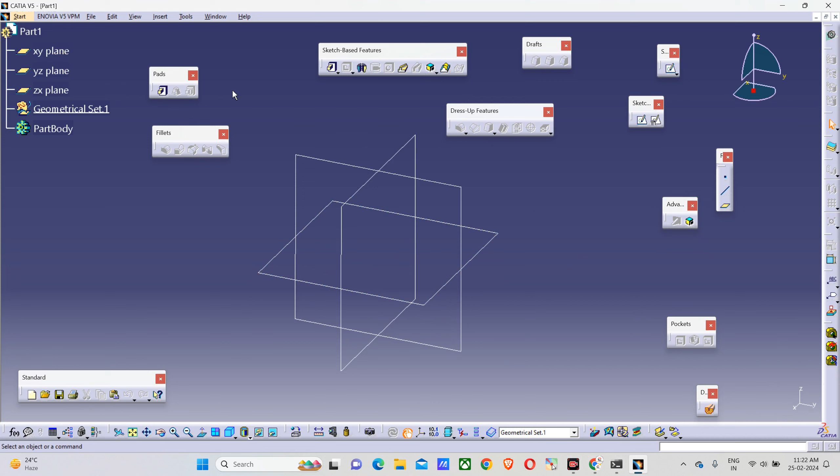What will be the first step? Hide all planes, right click H. The second step, quickly be aligned with me, we will proceed quickly. The second step... no reply.

Point 0 0 0. The screen is not visible, sir. It is not visible, okay. The screen is not visible. Hello? I shared the screen. Hello, sir. Okay, stop presentation. Earlier it was visible, now it's not visible. Just a minute. I think there will be some network issue. So the audio is clear. Yes, sir.

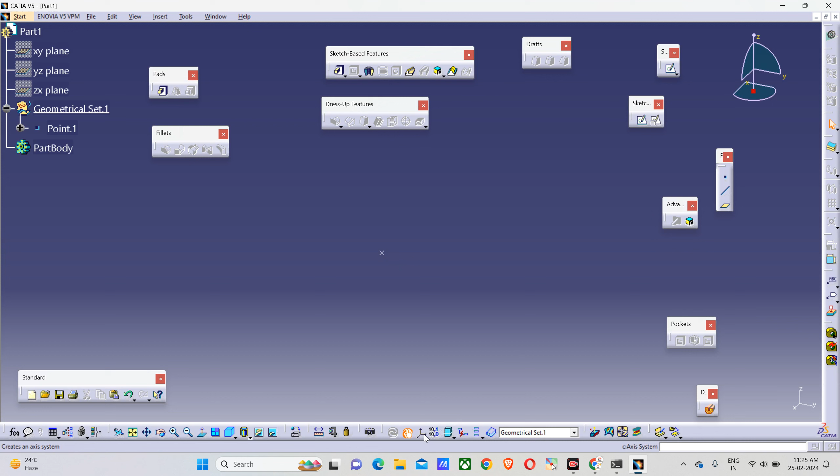So the first step is point, second is the axis system. We will give the input origin at this point. We will every time use a right-handed axis system. Press OK.

Any issue? Okay, position sketch. We will use the position sketch here. We have to select the axis. Yep, we will use this axis. Let's reverse the V. Our rule for the position sketch will be on the right side.

H, H, top side, V. Okay, reverse the V. Swap. Okay, low light.

I will draw a sketch. We'll give constraint, this is the constraint command. Click on this, give some dimension. Okay, what is the condition now? The color shows over constraint. Yes, under constraint, over, let this one be.

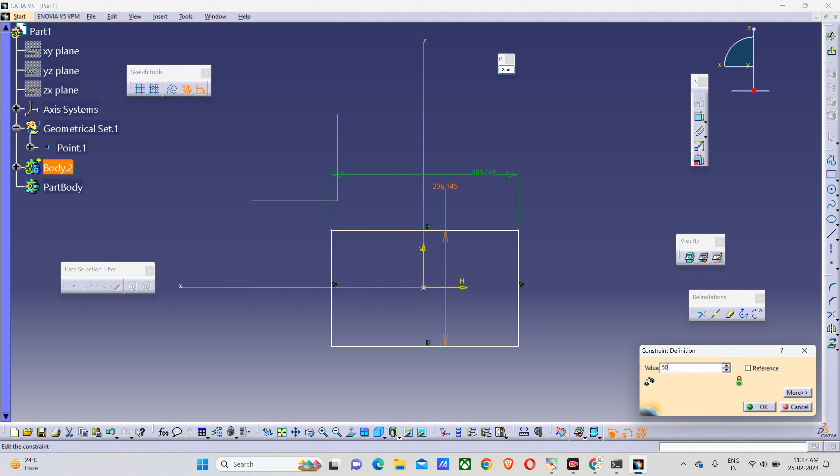100. See, once you get friendly with Catia, we will proceed very quickly. We will increase our speed. Okay.

So are you facing any issue with the mouse handling, or is it clear how to use the mouse? See, while moving, you don't have to use any keyboard button, okay? Just use the mouse.

Okay, insert body. So is everyone okay with the pad command? Is there any issue with the pad command? No, sir.

So what is the difference between the simple fillet and variable fillet? This is an interview question. Simple fillet dimension will be the same throughout, and variable fillet will vary according to the points where we keep different radius values.

Okay, so your name please? Asif. Okay, thank you.

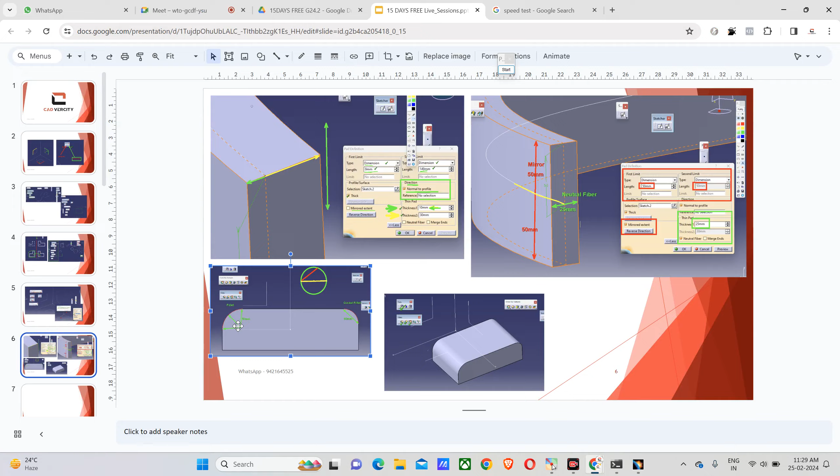Second question: what is the difference between simple fillet and chordal fillet? Simple fillet takes radius from both sides, while chordal fillet takes the distance of the chord. This is the chord and the simple fillet.

Okay, what is the option in pad? Pad width, dimension, and pad up to limit. Yes, up to plane. What are the multiple options in pad?

Thick, okay. Again, this option type, types, neutral dimension, fiber, okay these are the tickable options. Any option from this dropdown? Neutral fiber. Sorry, I'm asking about the type.

Up to next, up to last, dimension, yes, up to plane. Okay.

Up to surface - see, we haven't covered up to surface because we haven't started surfacing. We will cover it later. It is very simple, just like up to plane, but instead of a plane we give any wavy surface.

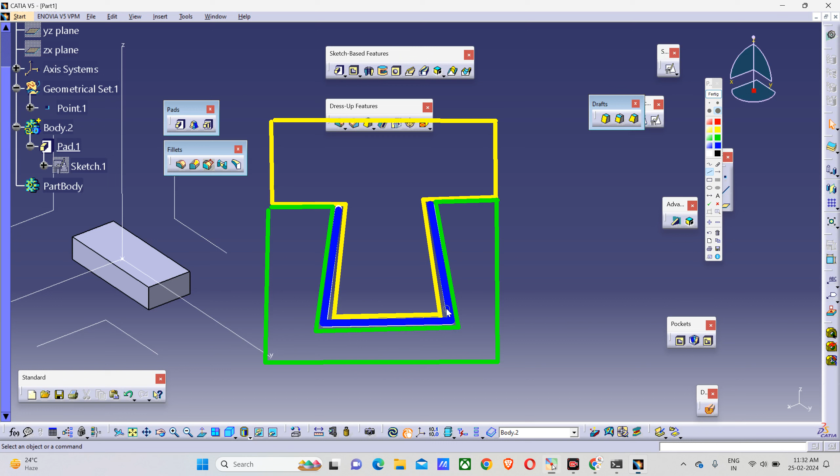Toolable means suppose you have designed this blue part in CATIA. So is it toolable or not? This is your tooling direction. What is tooling direction? It's the direction in which your core and cavity will disengage and engage, like this.

Okay, see this is core cavity. I will explain from the start. Suppose this is a blue plastic part. I design it in CATIA like this. Okay. So this is my part, something like this.

Having thickness of something 5 mm. So I will need a tool to manufacture this part. So how will be the tool? Like yellow and green, and my tooling direction will be like this.

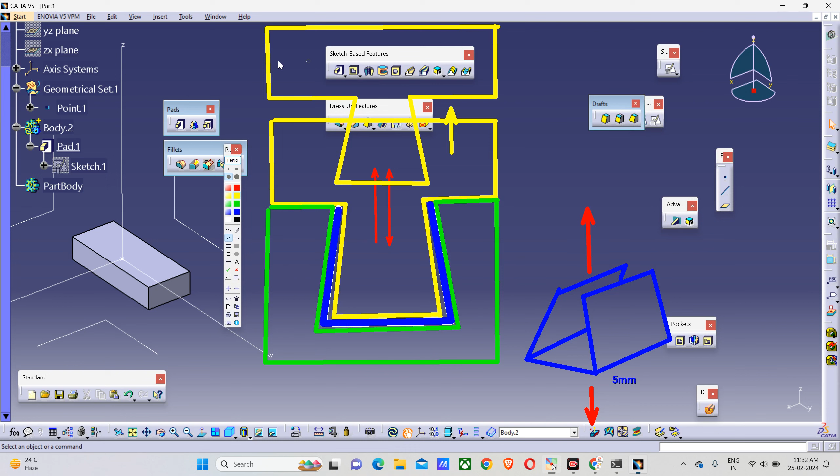Yes, what is the tooling angle? Okay, so the second drawing I will draw over here. First I will take a screenshot of this one. Finish.

See, today is Sunday. We will cover some technical questions, interview questions, and technicalities related to design. So this point you have to keep in mind while designing any part.

Okay, now the second condition. The same figure I will use. Okay, so yellow color, is it visible? Is it okay with the yellow? Yes sir. Okay, we will use some... so I have to use the same color because I want to show you what we can do. We will use this background.

Now is it okay? No, it's okay. See, for now this is the second profile. Just give me the answer whether it is toolable or not. Yes sir, now it is vertical. Perfect vertical. Yes sir, it is toolable.

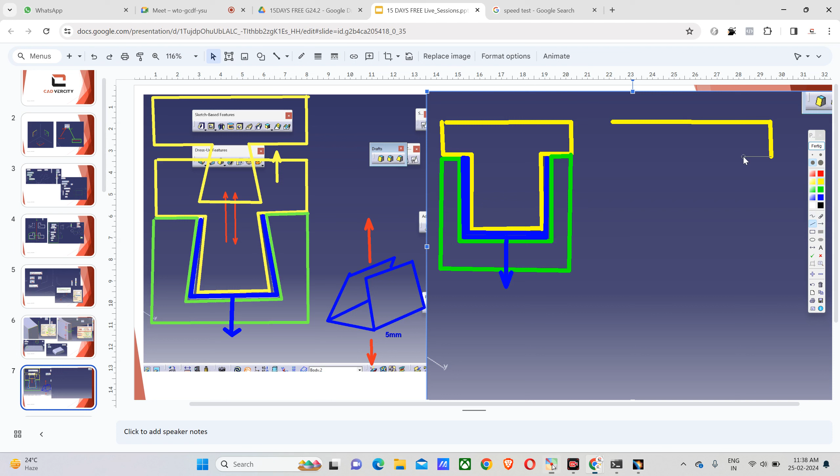So is it okay, meaning can we manufacture the blue part like this? Yes sir. Okay, now this is the third design, I will draw the last one. This is also possible.

Now give me the only one answer: the first, second, or third, which is the best? Third one. Second one. Okay, no, not second, not third. Just one answer: third, second, or first? Third.

Why? Because it will be easy to inject and move in the direction upward and downward, and less chance of destroying the material. Awesome, so this is the perfect answer. This your second statement is the perfect answer.

So there will be zero friction between the yellow, blue, and green. Yes sir, in this there will be friction, and this is impossible to engage and disengage in the first one. So can you imagine how this corner will come out from the green corner like this vertically? This will hit over here and also it will damage our blue part.

So what is this, the red line? Oh sorry, the red arrow. What is this direction? We call this MTD. Write it down in your book: MTD. What is MTD? Who can give the answer? Main tooling direction. And your question was, sir, what is toolability?

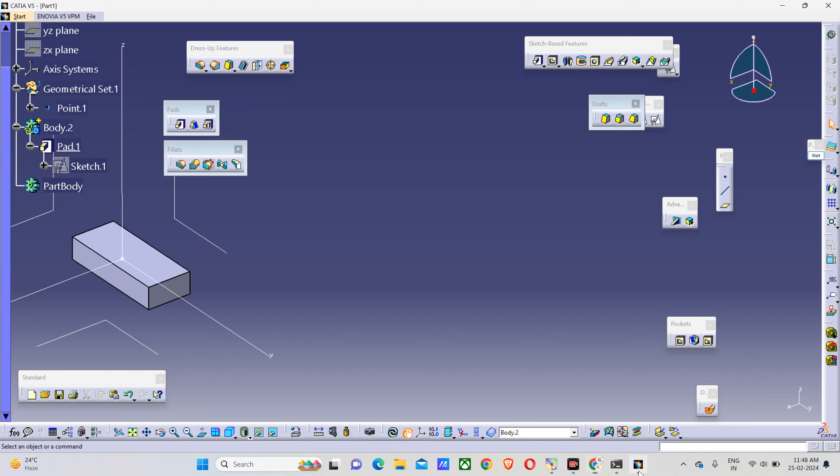See, this is our rectangle, okay. I will increase the height, make it 80. Right click on body. Okay, now we will provide the draft. The first one, we don't need the second and third draft. No use of this, just only the first draft.

See, in draft, we have to give two inputs. First input is on which faces you want to apply the draft. And the second input is what will be the neutral. What is neutral?

See, suppose I am giving draft to this vertical face. So what will be neutral? The neutral will be the bottom surface, this one, from which the draft will start. Okay, like this, suppose this is the box.

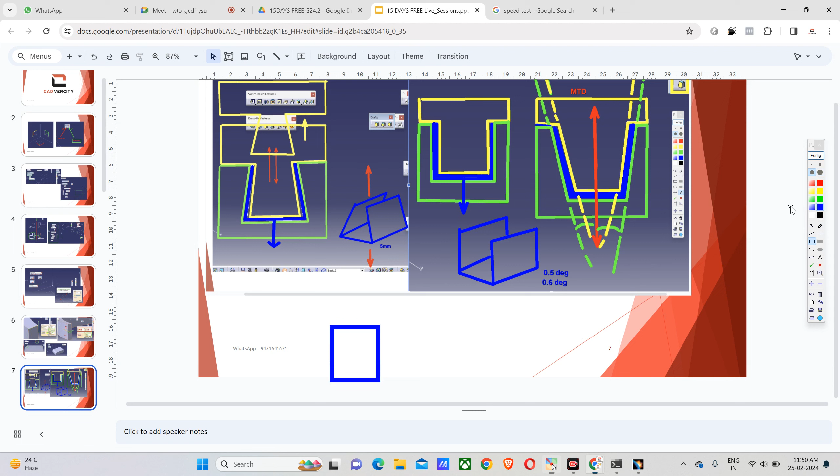I want to give a draft. Okay, so what will the draft look like? Like this, one, two, three. So what will the neutral be? See, I have to keep this length as it is. I want this length as it is, this one. So you can see the length is same. So what will be the neutral in this command? The bottom face. Bottom, okay, and what is this?

This will be my MTD. MTD.

Okay, the second case is the same. Suppose I want to keep the upper face as it is, like this. I will use blue, black, yellow, black. Okay, I want to keep this as it is. Okay, and it will be something like this.

Then which will be the neutral for this one? The neutral face, upper, upper side. And the tooling direction, downward. Remove green, this. See, in this, I will put upward. Are you getting my point? Yes, sir.

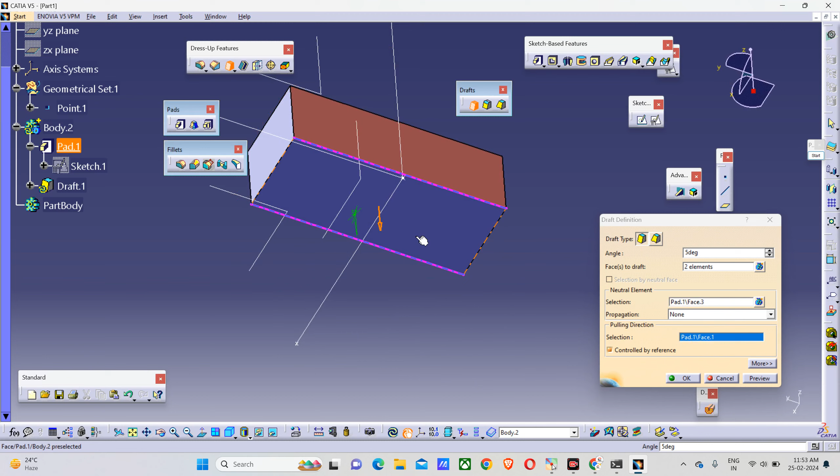By default, once you apply this command, the pulling direction will be normal to your neutral face. But you can change this direction. So here you can see the orange arrow is completely normal to this neutral face, and our bottom face is also perpendicular to our Z-axis. So I can give the pulling direction, or keep it as it is, or change it to Z.

See, previously it was downward, now it is upward. Is it okay, or is it the wrong direction? What should the direction be, upward or downward? Upward, you say. But what did we discuss earlier - downward or upward? Downward, yeah.

So now it is upward. I will show you the preview. Can you see the angle? I will increase the angle, let's say 15. Can you see the angle? Do we need this type of faces? No. So in our sketch, what was the condition?

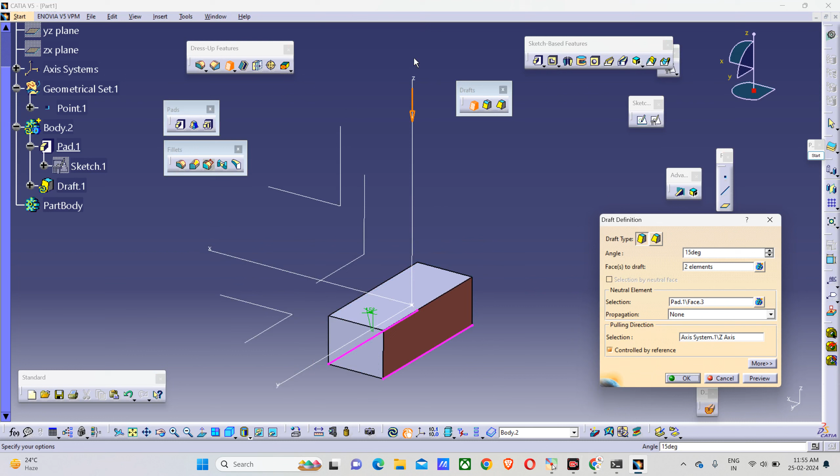So what should the pulling direction be, upward or downward? Downward. I will click on this arrow, it will get reversed. Now preview - is it okay? Can you see there is no change in the bottom length? But this upper surface length will change, it gets increased. I will just press OK.

So double click on the draft. What will be the minimum value of the draft angle? 0.5 degrees. On the safe side, we will take 0.6.

Now is it vertical or having the draft? I will click on this Y because I have drawn the sketch on the ZY plane. Once I click on the compass, you can see the compass, I will press on Y. Now is it vertical or drafted? The vertical faces - is it drafted? See, our sketch is perfectly vertical, but once you zoom, you can see there is a small change.

It's a very small step change in angle. Can you see the angle? Is it a small change? Sir, this change is very negligible.

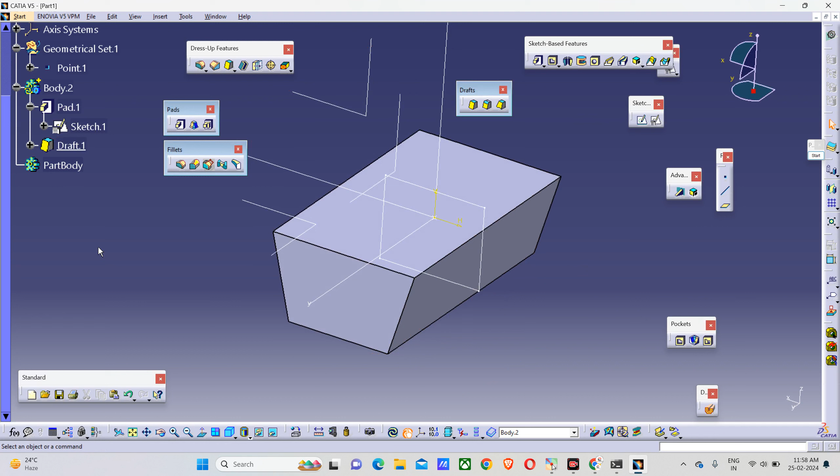So what do you think, shall I give draft to this face also? Just a minute, what I will do is increase the angle for now, let's make it 15. We want such type of design, with thickness of 5mm. Can you see the 5mm? What I will do is use pad draft - see, once you click on the command, it gets highlighted.

On this two faces I have given the draft. What I will use after the draft is the shell command. We use this command, okay? Shell - what will be the inside thickness? 5mm. Everyone knows this command shell, we covered it yesterday. So for face to remove, I will remove this face and this face. Press OK.

But there is something missing related to toolability. Is this part toolable? Yes or no?

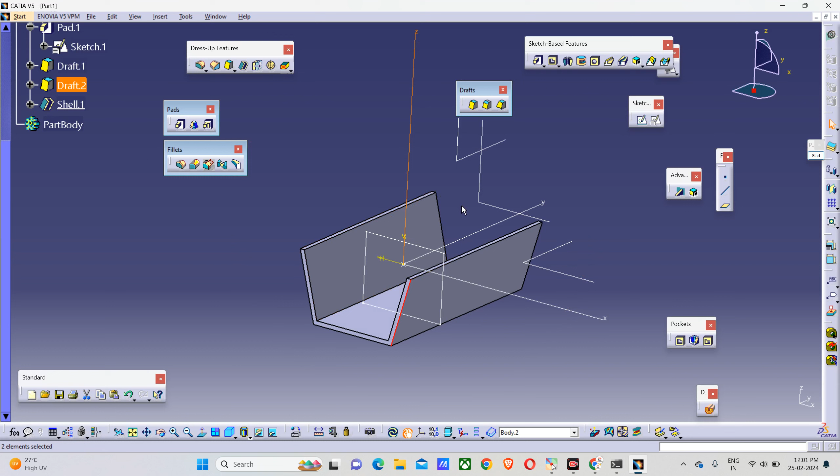Previous two steps means okay, see.

What did we do? What was the first step? I had drawn one rectangle like this. On which plane? The YZ plane. Then see how to check the history.

Right click, shortcut F. What do you have to do on pad? Suppose I'm sharing this file with you, what do you have to do? You have to right click on this command and press the F button. Now this is your first step.

I have drawn one sketch, then I have the pad. What is the second step? Right click on Draft, second command, right click F. I have provided the draft on these two sides.

How? Double click on the second command and check. You can see this box, you will see face 1, face 2. Yes, close.

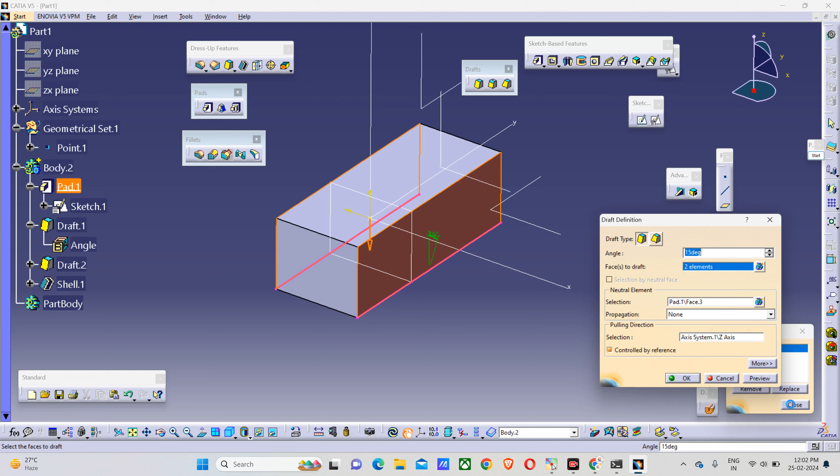Then what is the input? The blue one, the blue surface, is the neutral element. Click on this box, you can select and check this is the neutral element. I will close this one. And what is the pulling direction? Z axis, can you see? Z1, this one.

Preview. So the drafts are okay. I'll press OK.

What was the second step? Third step, this second one is done. Third step, right click, shortcut F.

See, these are the two faces. Double click. What is the input? Face 1, face 2, rear and front face. Close. For the neutral, you can see the bottom face is neutral.

Close. What is the pulling direction? Z axis, you can see the Z axis. The direction is downward. Preview.

Okay, don't press OK, just you are checking. So press cancel. Okay.

Then what was the fourth step? Right click F, Shell. In shell, what input have I given? Double click on shell. I have given the front face, top face, and the rear face.

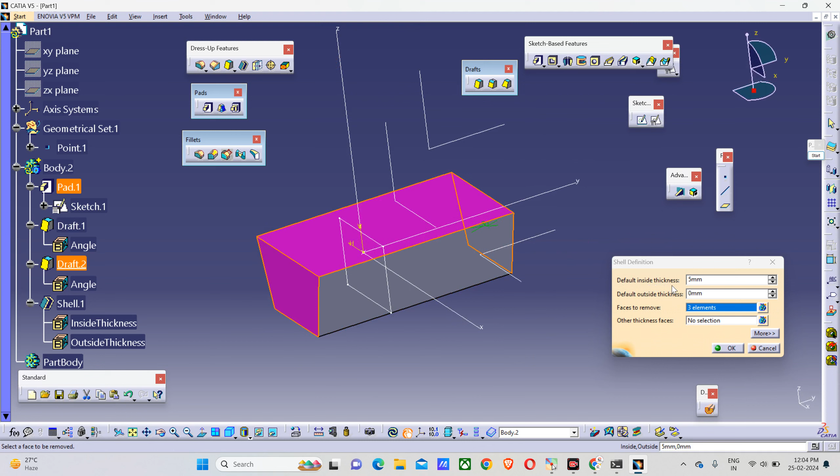I have provided the inside thickness. You can give the outside also. Suppose I want inside 5 mm and outside 0 mm. Press OK.

See, okay. Any doubt? No sir. See, suppose I want these faces smooth.

Fillet. When can I apply the fillet, on which command, and what position will the fillet take in our tree? Sir, here now we can apply, or before shell. Awesome, before shell.

Once I provided the draft, I will define over here, right click F. I want the fillet command between draft and shell. What I will do is define the draft, then click on the fillet.

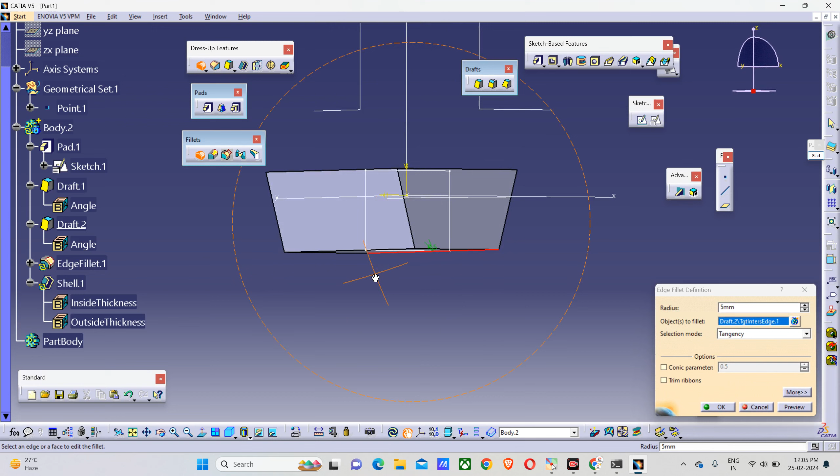1, 2. Giving fillet of 5 mm. Let's see, okay. Press OK. Now what will the next step be?

Define shell, right click F. Then again right click L. Awesome. Is this the sharp edge or a smooth edge?

Smooth. In which mode can I see the edges? Yesterday we discussed the third one without smooth edge. Here, once I click on this, you will see only sharp edges.

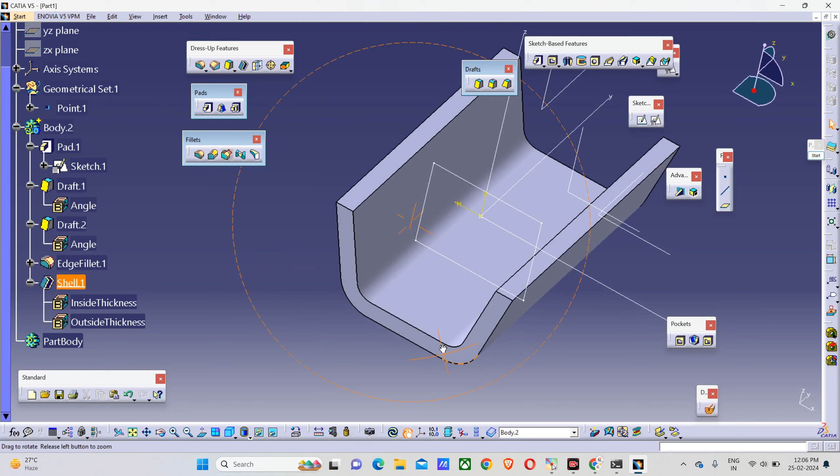So once I see this, can we do one thing? I can provide fillet to this face also, these edges. How can I do it?

Now also it is possible. Before shell, can I do it? Yes sir, okay, so what will the process be?

Where should I define first? Now you can again go to edge fillet one and then right click F. Okay.

Now again choose fillet. Sir, fillet. And take both edges, 1, 2. Preview, okay, it's okay.

Then shall I define shell? Yes sir. Shell, right click F. What is the shortcut for update? Right click L. Awesome.

So this way you have to play in the tree. What do we call this? Tree.

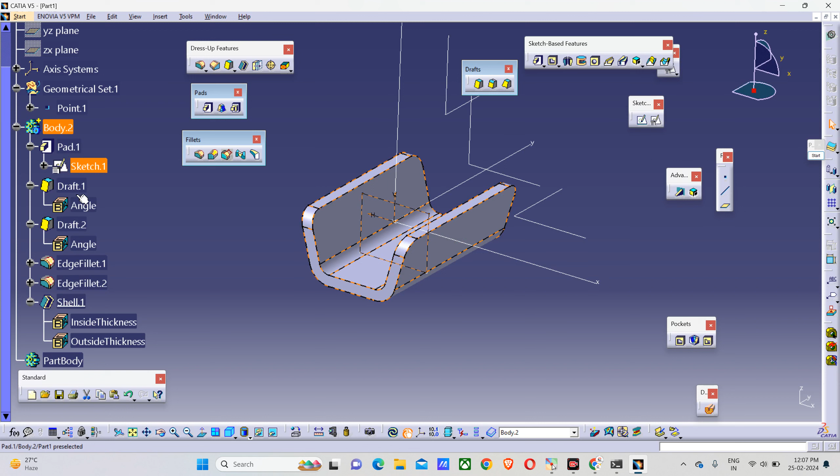Okay sir, so now you can give fillet over here. One, see you can see the flow. Once I click on this, it will flow smoothly.

You can give the fillet of 0.5 just to avoid the sharp corner. Enter.

Awesome. So this side also? No, that side we will not give the fillet. Why? Again, it's an interview question. Making it sharp, no, no.

See, once I keep it like this, now what will be our tools? I will draw a tool sketch. How will our tool be?

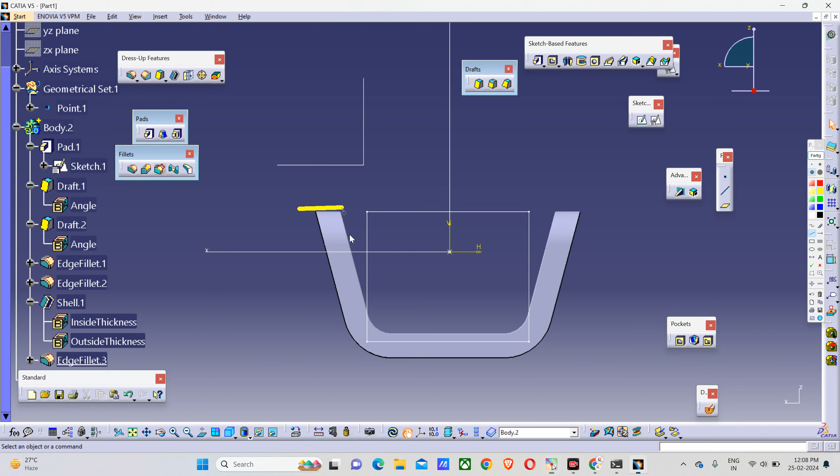This will be your interview question. Okay.

So here you can add fillet. Yes, where you can add the fillet. Over here you can add the fillet. Here we added the fillet.

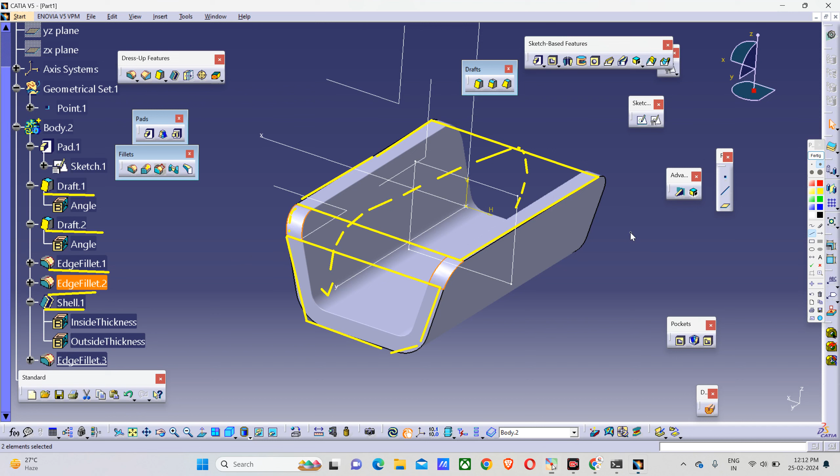Okay, any doubt? Yes, no? No sir, thank you. Okay, so we are completed with this one. Don't use this second and third.

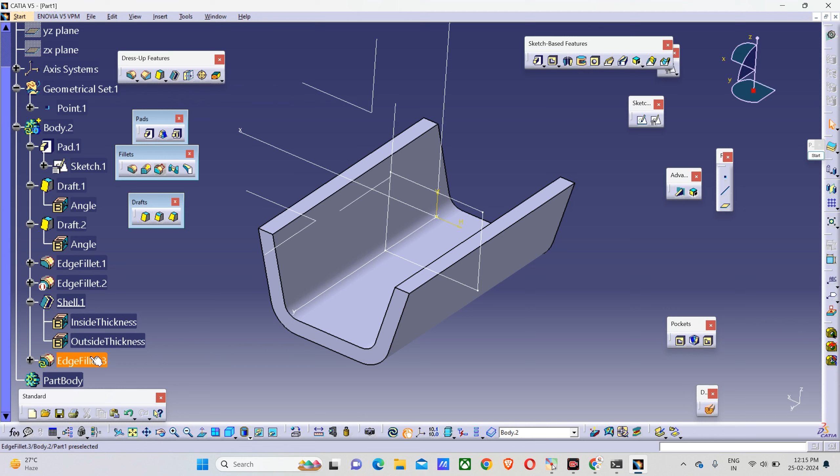Okay, just a minute, shall I update this fillet? Right click F. See, previously why I'm doing right click F then right click L - because I can see by right click F the previous fillet was something like this.

Okay, but once I click on right click L, can you see this fillet over here only, this one? So can I give fillet now over here, four times? Where should I place my new fillet of this corner in the tree? 1, 2, 3.

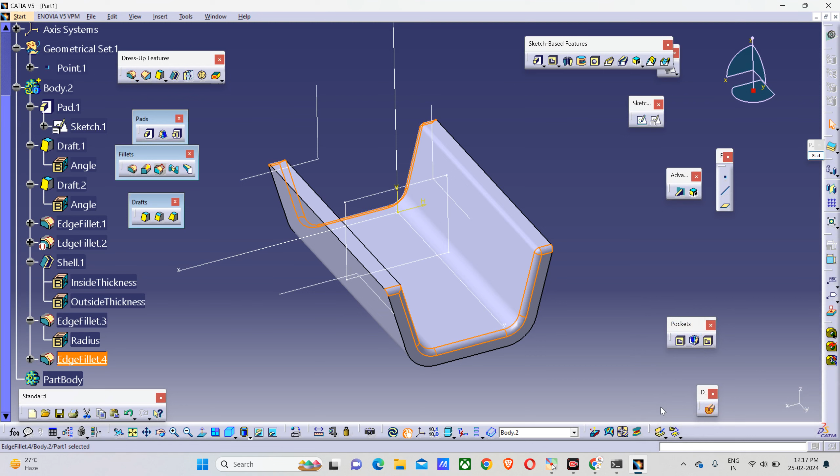So is this okay or not okay? Is this okay or not okay? Yes, not okay sir. So instead of giving fillet over here, I know that this fillet can flow.

I will define this fillet, okay? Right click F. I know that if I'm giving the fillet over here, it can flow something like this. Just a minute, it will flow something like this. It will come like this. It will go downward, it can flow something like this.

But before this, I will need a smooth transition over here on the corner. So what I will do, I will define this fillet, and after shell, I will apply this command between shell and this fillet.

Yes sir, how can I do this? I will right click on this one, EdgeFillet 4, I will reorder. See, we will learn this reorder later. Okay, I will delete for now. Maybe we can delete it later.

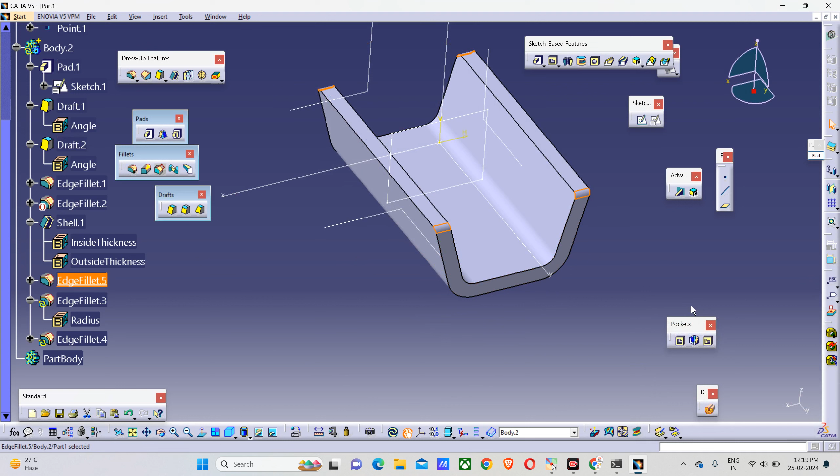Yes, after shell, now you can see we are getting a smooth transition like this. On this fillet I define, right click F.

Previously the fillet was something over here only, but it is in red, meaning it is in update mode. Once I update it, right click L. Can you see the flow?

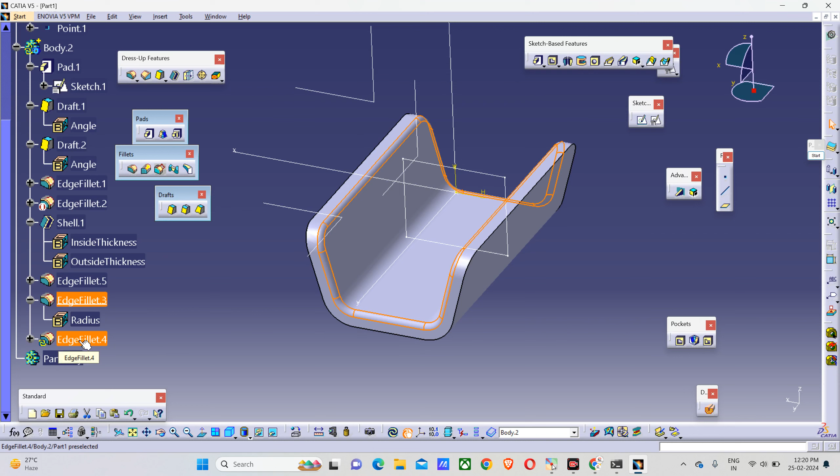If I define, right click F, you can see here we were having a sharp edge.

So the flow of the tree should be good if you want to minimize your design. Instead of giving 3-4 fillets, just give one fillet. It will flow something like this.

So now I can deactivate or delete this command. Right click, delete. Okay.

So just tell me, see, we have deactivated this one. So was the first option good or the second option good? After shell, then fillet - first option was good. So what I will do, I will activate this one.

Right click, activate. I will define, right click F. I will update, okay, this is updated. Then we applied the shell command.

Right click F on shell. Right click L for update. Then we provided - so we don't want this fillet now. Do we need this fillet now? We are already getting this fillet in shell. So right click F, we don't need this.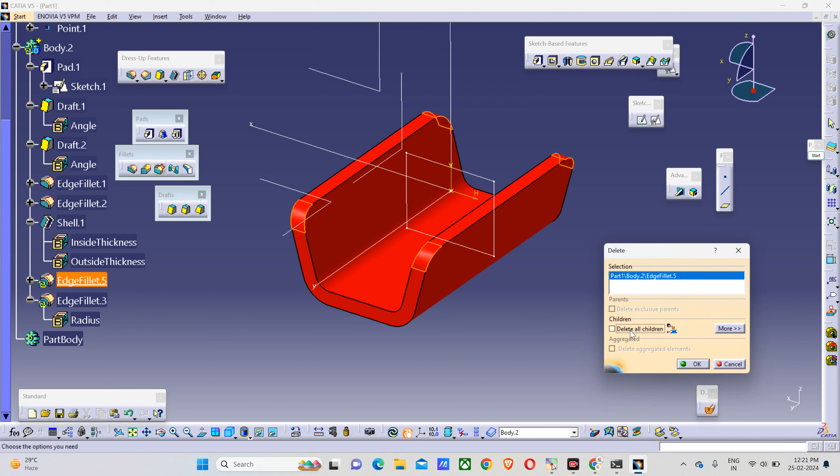You can deactivate or you can directly delete. Delete - see what is the warning? Once you delete this command, this fillet will also get deleted. But I will untick this, don't delete, meaning delete all children. I will deactivate this, will press OK.

Any doubt? See, why am I explaining and spending so much time on this? Once we start some complicated design, you have to keep your history very simple, okay? This is a very simple and systematic design, what we need.

Any doubts? No doubt. Okay.

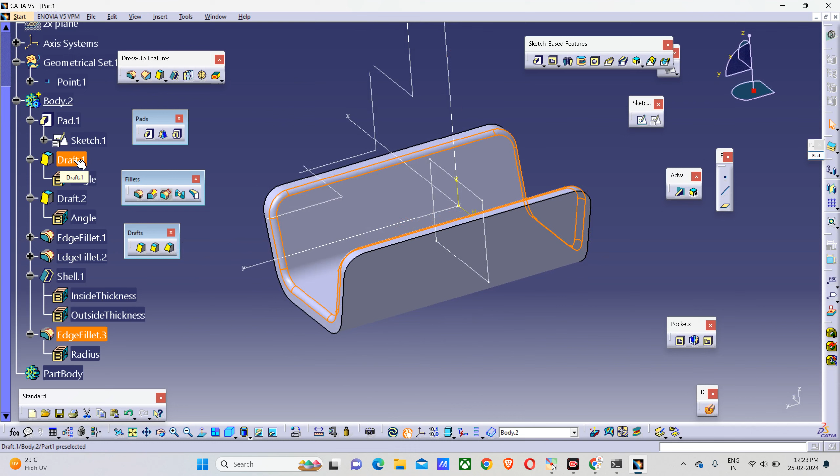See one point, we will check our draft direction. I will define this draft. This draft is okay, okay. And this draft - what do you think, is this draft okay or not? What do you think?

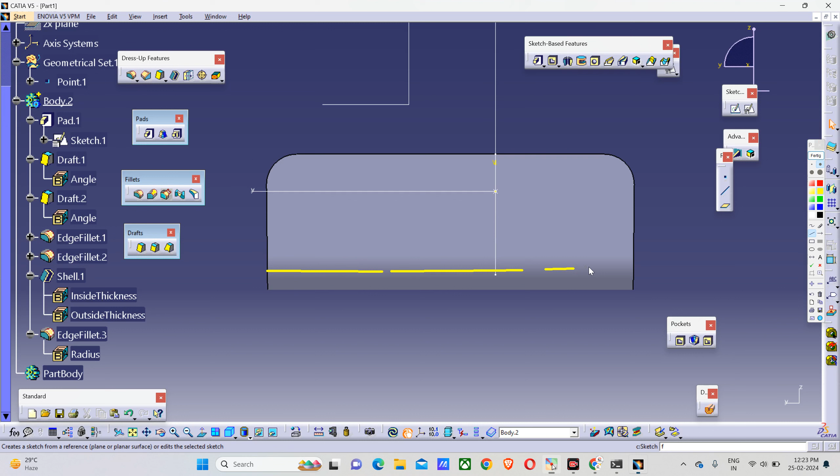So what will be the core cavity on this side? If I draw with the sketch, it will be something like this. See here we have thickness, yes - thickness of something 5 plus 10. So our core will be something like this - core cavity.

So here we will need the draft angle concept. We will cover that concept later once you start 3D modeling. Do you know what is draft angle? Does anyone know what is draft angle?

The second name for that concept is shut-off angle. No, sir? Okay, no issue. We will cover that, it's an interview question. We will cover it later.

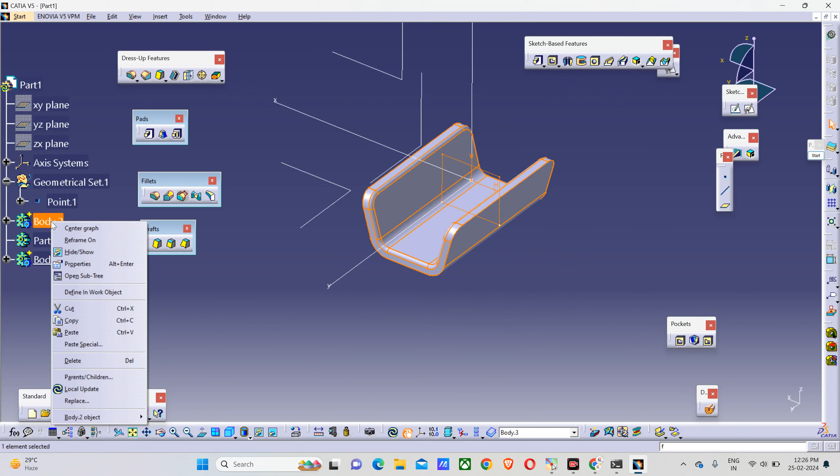See, what I will do, I will copy, right click copy. What will the shortcut for copy? Control C, or right click copy. I will right click on this part file, will paste. I will get a new body, body 3. I will hide body 2. Okay, this is our first body. I will hide this one.

And who was asking the question? Your name please? Abhi sir. Okay, so you don't want fillet over here, you just want a sharp edge.

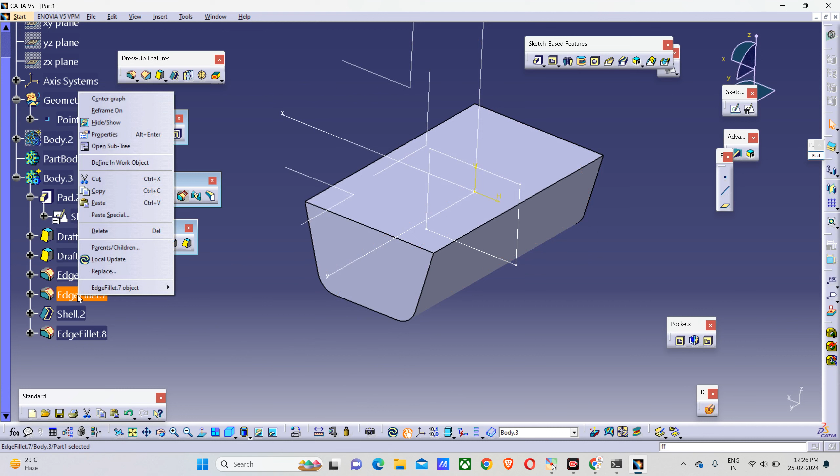So I will check the history. First, right click pad, define. Right click on draft 3. Okay, this is also okay. Right click, draft is okay. Right click. So this fillet is also okay. Right click, okay, right click.

See, now you are having a sharp edge. If you don't want any fillet over here, you will need to cancel this fillet. So why are we getting this fillet over here? What is the reason, on this two area?

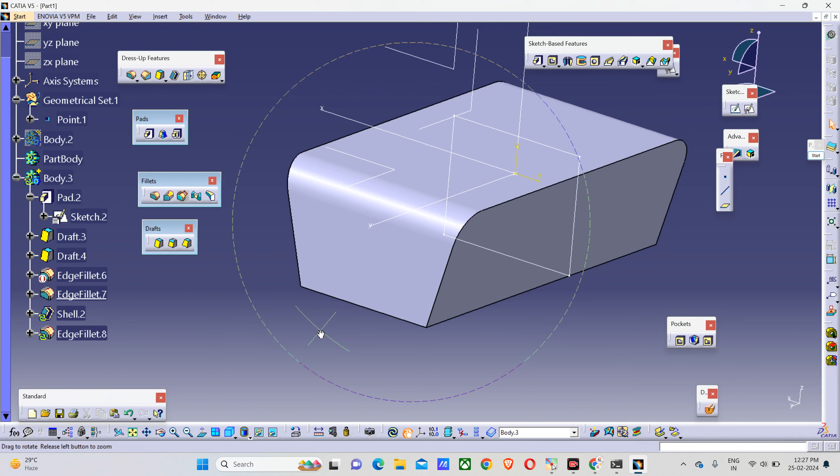Now right click, will check, right click. Okay, define the shell, right click, right click. Now is it okay? Okay, matches now. Now I will update the fillet, right click, it was like this before, right click.

This also needs a side fillet. So what I will do, I will add this edge in this fillet. How? Double click on this fillet. This side edge is already added. I will click on this box, you can add multiple edges. We'll select this edge, it will get added under this one. Close. Okay, two elements are selected for the fillet. Press OK.

Now it's okay. Now you can give fillet over here if you want. Fillet, edge, let's give 10 mm. Preview. Okay, we needed to give it on the inside too.

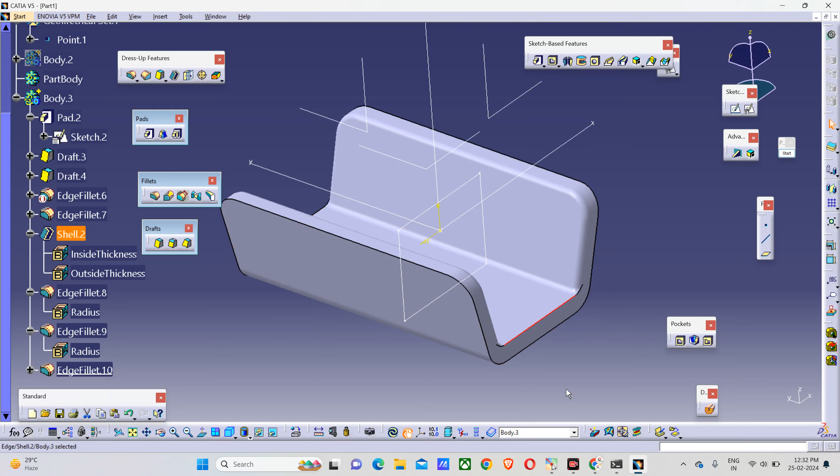Yes sir, okay, but if we consider the tooling, this is not okay. Yes sir, this is not good for tooling. Not okay, we will need a fillet.

So you can see the first body. I will change the color. How to change the color of a body? You will have to right click on this one, right click on this toolbar, activate this one, graphics property. You will get this tool. Select the first body, I will select the first body too, and give some color, something like blue.

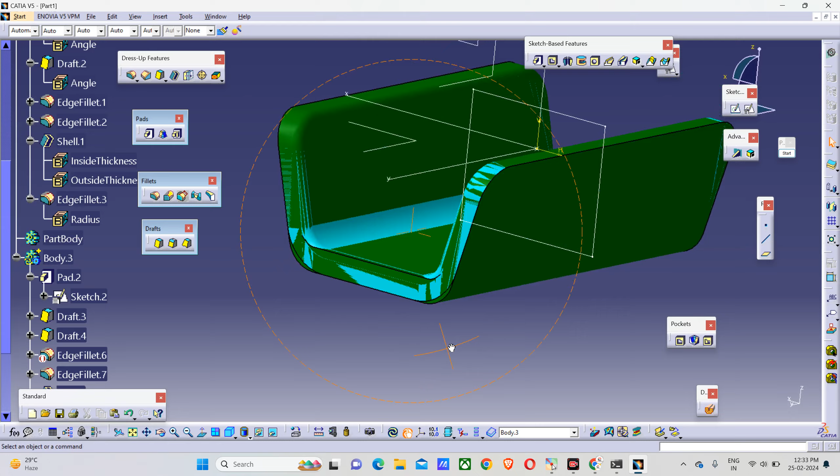Can you see the difference? The gray and the blue one. Body 3 is the gray one. I will change the color, let's make it green. Can you see the difference? Here in green, sir, we have a sharp corner. If you hide the green one, I will rename it.

How to rename? Right click, property. What is the shortcut for the property? O. In feature property, I will type green. For naming, there is one rule: you have to rename the body in capital letters only, and instead of space, you will use underscore. Green body, like this. Clear?

Yes. Right click, shortcut is O, in feature property, BLUE, blue body. We will use underscore instead of space.

So I will hide the green body. Right click H, you can see the smooth one. I will show the green body again, right click H. Hide the blue body, right click H.

Can you see the difference between the tree? After shell we have applied 3 fillets, and here you can see after shell we have applied only 1 fillet. So total commands: 1, 2, 3, 4, 5, 6, 7. Here 1, 2, 3, we will not consider this one, 4, 5, 6, 7, 8.

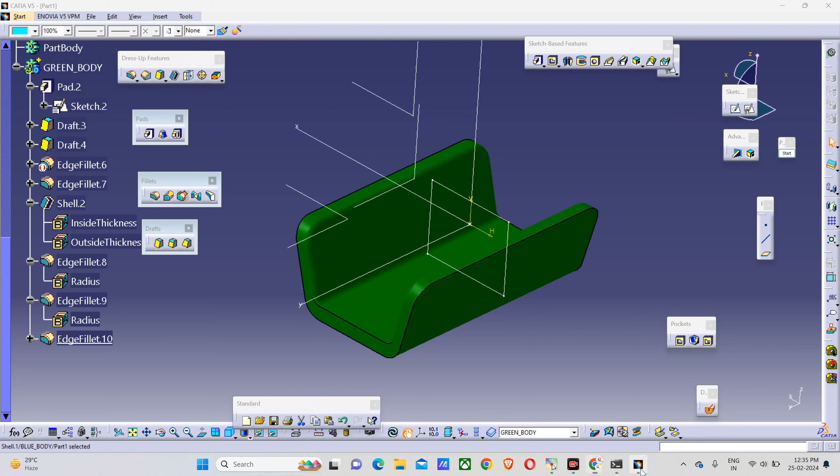See, this is also a box. Okay, the difference: suppose if I change the draft angle for this.

So suppose I'm having a tree of 100 commands, how can I find where is my command? Shall I scroll like this, going up and down trying to find it? How to find it? No sir, if you click on it, it comes up, right? So how will I do it?

I will right click on the face of whatever I need. Yes, whichever one I need, I will right click on it. See, if I want this fillet, right click on this fillet, center graph, it will show that this is your fillet.

Suppose I want the draft angle for this, I will right click on this, center graph. But this is not a draft, this is a shell after draft. So if you define it before shell, right click F, again right click on this face, the drafted face, center graph. It will show the draft command.

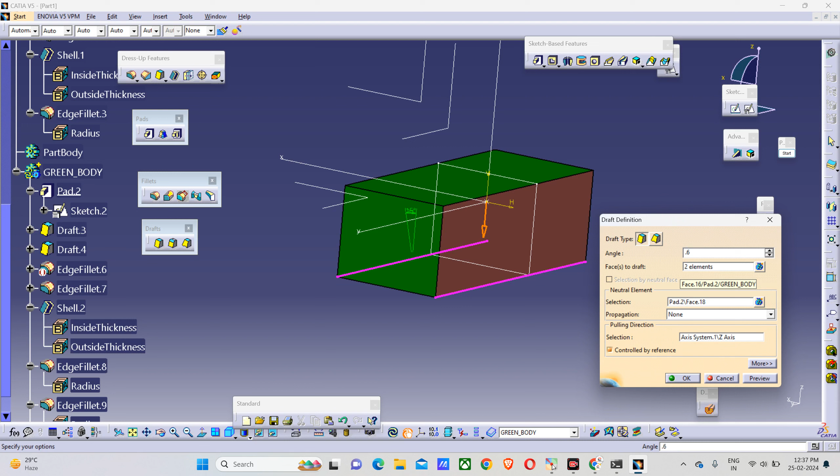Double click on the draft command. Make it our minimum requirement for the draft tooling, 0.6. You can also keep 0.6. Okay, press enter. I know the complete history will get updated, so I will click on update all.

So where is our shell? I'm not able to see the shell command. Why is it something like this? Previously it was something different.

वापस से शेल पे जाके लोड करना पड़ेगा। Load नहीं, डिफाइन करना पड़ेगा। Okay, so instead of load, define करके shell. Can I define on this complete body, green body? हाँ सर, उस पर भी हो जाएगा, right click F. So this is a final result.

किसका क्वेश्चन था वो बॉक्स वाला? क्या क्वेश्चन था, प्लीज रिपीट। सर मैंने अभी किया था, जैसे कोई बॉक्स रहेगा उसके अंदर कैसा करेगा अपन? मोल्ड? नहीं, मुझे इमेजिन नहीं हो रहा आपका कैसा क्वेश्चन है।

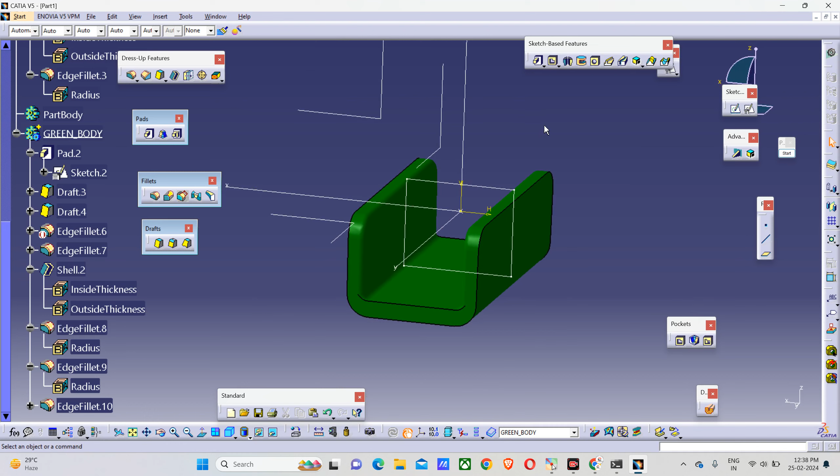अभी जैसे कोई बॉक्स है जिससे अपना राइट से भी अपने पास कुछ कर्व रहेगा, तो राइट से कर। ओके, राइट से कर मीन्स कैसे आप बोल रहे हो? इधर से भी आपको ऐसे ड्राफ्ट चाहिए क्या? हाँ सर, यहाँ से मेरे को कर्व चाहिए।

कर्व मतलब समथिंग लाइक दिस सी शेप, यस सर, लाइक दिस फ्लावर पॉट। ओके, सो उसके लिए आपको 1-2 दिन रुकना पड़ेगा, बिकॉज वो शेप हम अभी नहीं निकाल सकते। ओके, आई कैन ट्राई समथिंग लाइक दिस। आई विल हाइड दिस बॉडी, विल इंसर्ट न्यू बॉडी।

ये प्लेन पे स्केच निकालते हैं, पोजीशन स्केच, दिस प्लेन, एच रिवर्स, vertical, right side edge. Okay, how will I draw? Like this, constraint 100.

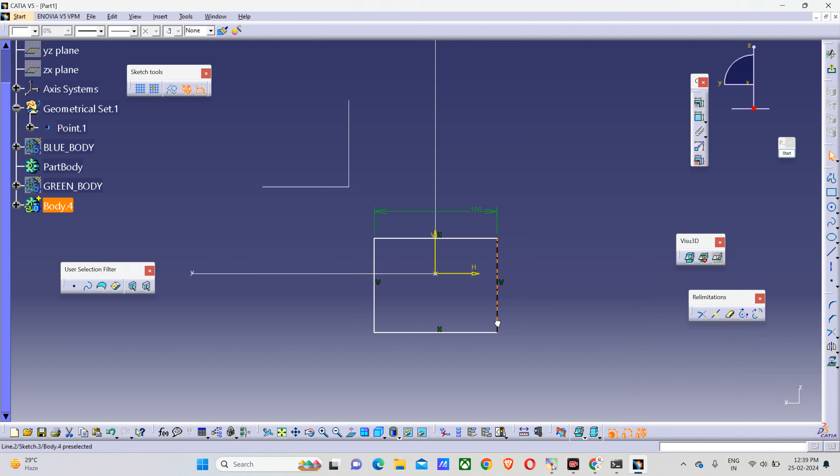We'll keep something over here. I will delete this vertical one to delete. We'll use a spline from this corner to this. Press escape, spline.

Escape. So instead of drawing this plane, can I do one thing? I will delete this one. I will also delete this one. I will use the constraint. I will make this line first point, second point, right click, allow symmetry.

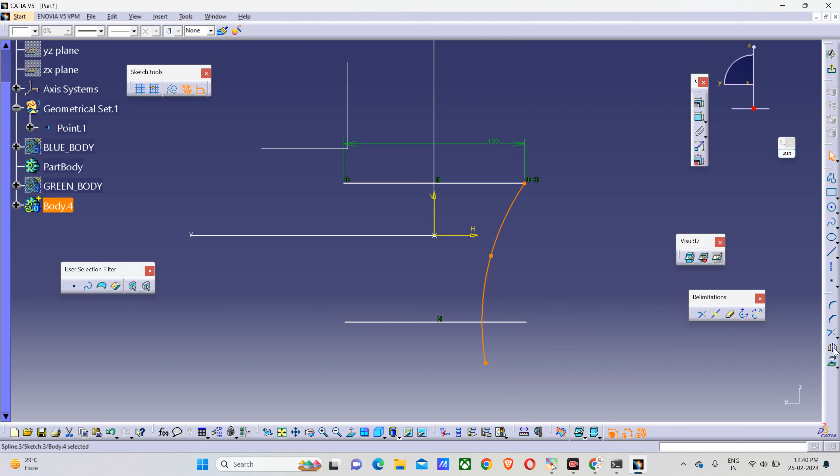Use the spline, spline command, 1, 2, 3, escape. I will select this plane. We'll use mirror, click. Then which command will I use? I will need a sharp corner over here.

Radius trim. ट्रिम करके फिर sketch में radius देंगे। If we are providing fillet or radius in sketch, it will be difficult for our draft command. Yes. So I will activate fillet. I will use this first one to generate a corner. 1, 2. Again trim, 1, 2.

Exit workbench. अभी क्वेश्चन था इनका। I will pad. Okay, see this arrow defines the direction of pad. You can reverse it. Okay, suppose this is something like this. Preview, you can reverse on clicking on this arrow.

Click, reverse, preview. Okay, so see, for the tooling, do we need draft on this face? How will be the tool? नहीं सर, खाली फ्रंट को और रेयर को लगेगा। Yes.

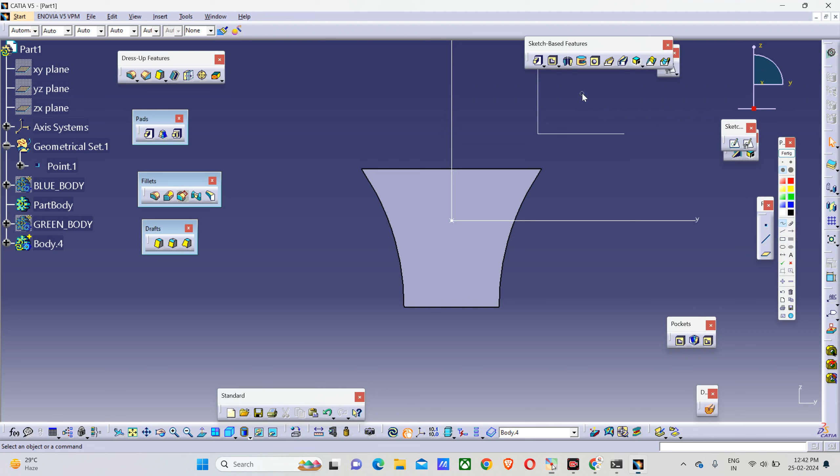जिनका क्वेश्चन था उनको समझ में आ रहा है? हाँ सर, लेकिन अभी यहाँ पे भी मेरे को वैसे ही कर्व चाहिए और साइड में रेडियस ओके चाहिए। ओके ओके ओके, आपको ये साइड में भी कर्व चाहिए, हाँ, और ये लाइन पे रेडियस चाहिए राउंड, और ये वर्टिकल इस पे वाले आपको रेडियस चाहिए। जी यस। ओके ओके, सो वी विल नीड boolean ऑपरेशन फॉर दिस।

ओके, सो boolean ऑपरेशन क्या रहता है? We will cover after 2 days, after 2 sessions we will start the boolean operation. See, today we have covered draft, maximum point related manufacturing, which is very important, because even though if you are working for the 10-year, 15-year, 20-year, what we learn today you have to consider this point.

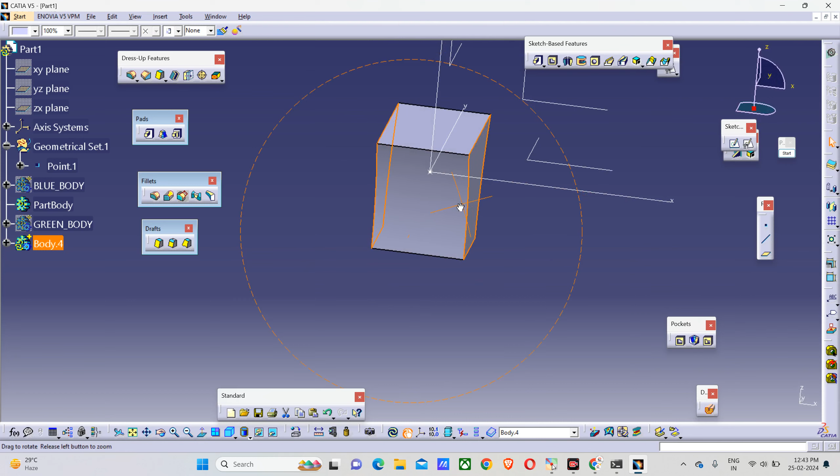In each and every project, every day you will think about this part and the 0.6-degree draft. Okay, so your requirement is a flower pot having a curvature on all four faces. So I will use mirror, extend, will keep equal something, let's say 30. It is not square. Okay, I will show you how to draw this very quickly. And you also want a curvature on these faces. Yes, so we will cover this after 2 days. Okay, just keep in mind and ask me for this concept.

Yeah, I will explain. Okay, any issue? Draft is covered, dress up is done, chamfer is done, pad is done, shell is done. Okay, shall we proceed for the next command? We will not use this one, no use of this. See, instead of wasting or engaging our time, we will quickly start the perfect design, what we use in project.

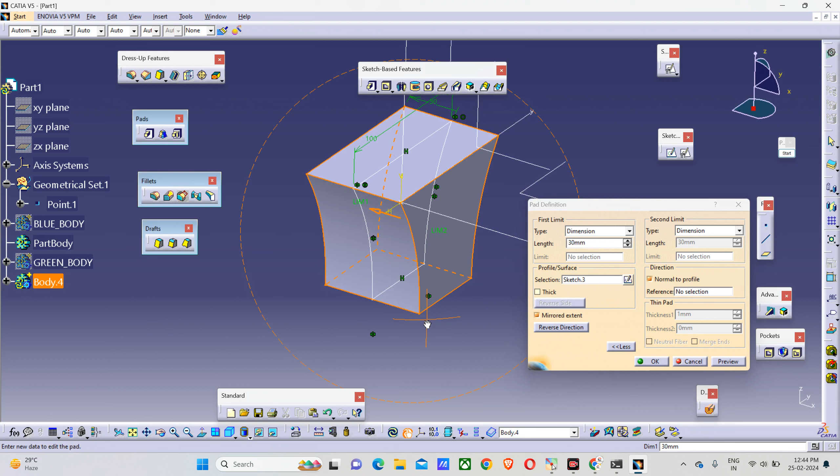Shall we proceed for the next command? Any doubt? No doubt. See, the next command is thickness. What is thickness? I will double click on this. This is mirror extend 30 plus 30. Okay, once you click on the mirror, and if you are giving input as 30 mm, by default the second limit will take the 30 mm. So total is 60. How to measure? Measuring item, select the edge. Here you will find the 60 mm.

Okay, let me show you. Let me unhide the green body. Suppose you want to measure what is the fillet value of this fillet. How you can measure? Just click on the measuring item, this one. Click on the fillet. Can you see the radius? 5 mm. Just click on this fillet. Can you see the 20 mm?

See, suppose you want that dimension to stay as it is, you will have to activate this one, keep measure. Click on this. Now you can check the multiple fillet. Here it's not showing the fillet. Why? Because it is in turning, it is on the turning point. So you can select this face, you will get 20 mm.

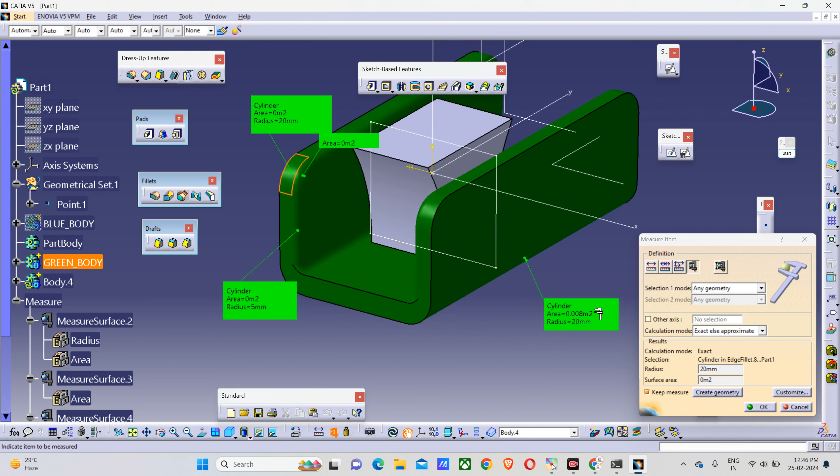Okay, the measuring tool is okay. Cancel, I will hide this one.

Hide. The next command is thickness. So it is something, it is of 60mm pad. 30 plus 30, mirror extend.

I can add 10mm more on this side. How? Thickness, click, you can give 10mm over here. It will add extra 10mm material. Now it is 70mm.

Measuring tool shows 70.

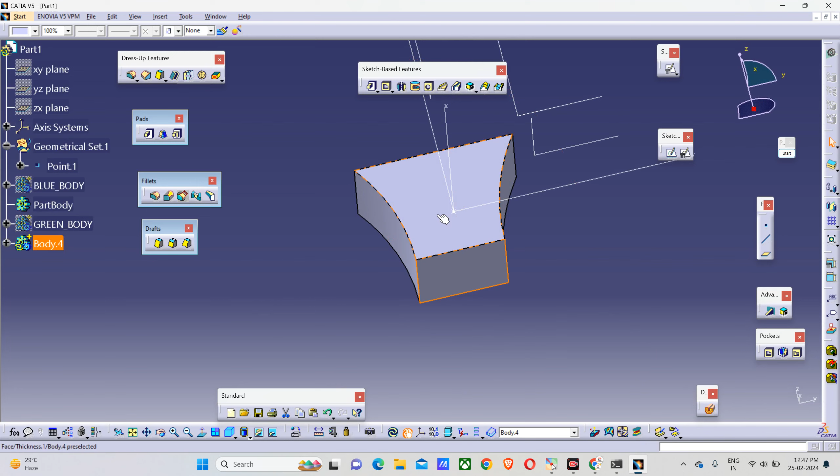See, I can apply thickness on this face also. Once if I apply thickness on this command, it will add 10mm. Can you see? It will consider the top face, bottom face, front face, and rear face.

Yes, and it will calculate the 10mm material. We'll add it in the original body. You can see it in the tree.

Okay, suppose I applied thickness on this side, I applied thickness on this side. And suppose if I add a fillet over here of 10mm, can I apply thickness on this face again?

No idea. Okay, see, I will activate the thickness command. We'll select this face. See, the error is: note that one of the selected faces is already thickened.

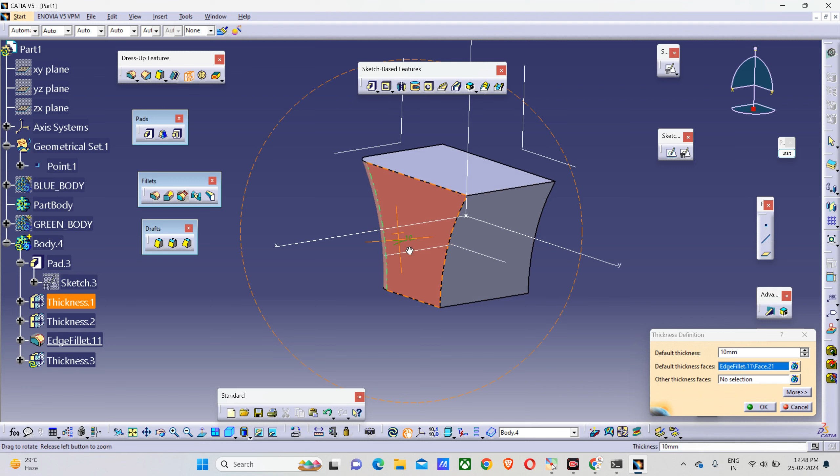So see what will be the result. I'm giving thickness of 10mm. Press OK. Can you see? Just because we applied the fillet, if I'm applying thickness on this, it will reflect on this side also. It will select 1, 2, 3, all three faces.

Yes, sir. Any issue?

See now if you want to remove this face fillet, can we remove it? I will not delete the command, just I want to remove this fillet.

You can use remove face, but again, remove face depends on the calculation. CATIA will calculate what CATIA will do. See, after removal of this fillet, see the fillet flow is something like this.

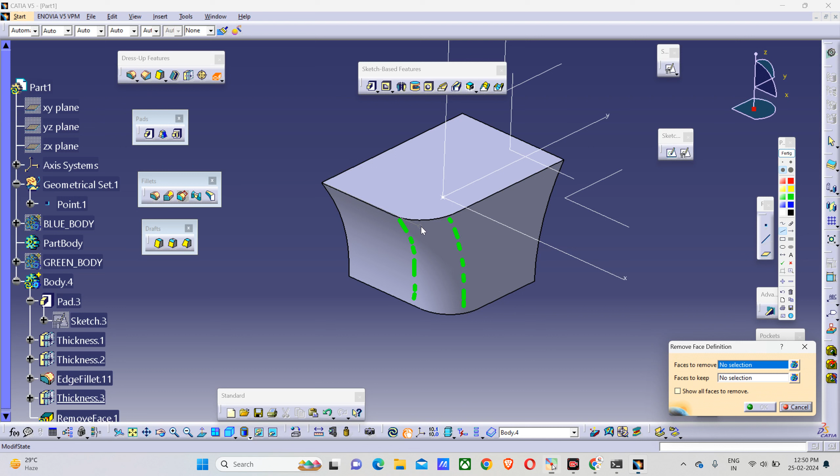Yes, after removal of fillet, what will be the result? Something corner like this, but there will be a smooth transition, something like this. So CATIA will calculate this one.

We'll press on this one, we'll select this, we'll press OK. See, in projects, we try to avoid this one, but anyhow, whenever we need such type of operation, we apply this command.

Okay, but this command is prohibited not to use in project, but it is not necessary. Means once you deliver the project, no one will check which command you have used over here.

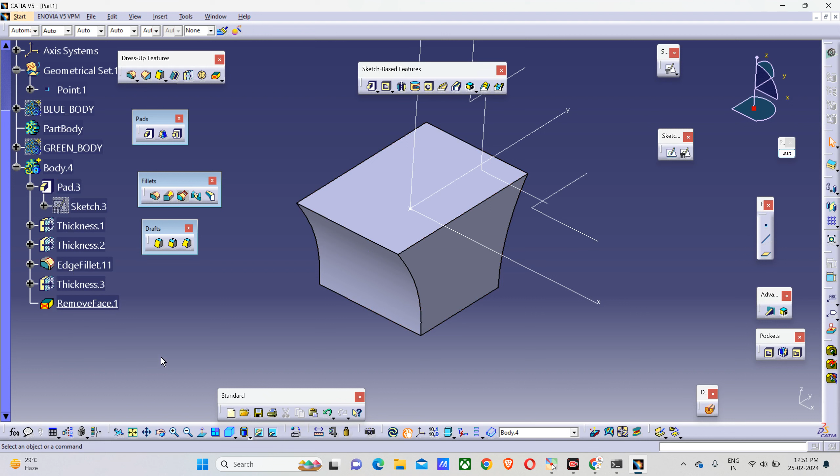But you have to keep your tree very simple and easy so that in future also, means next week, if there are some modifications, you can modify it quickly. So keep your tree very simple.

Don't add unnecessary thickness, again fillet, then remove fillet, then again thickness. Don't make it very complicated.

So we are done with this command. We have completed with the pad. We have used the fillet, draft.

Shall we stop over here? Any questions? Shall I repeat any command?

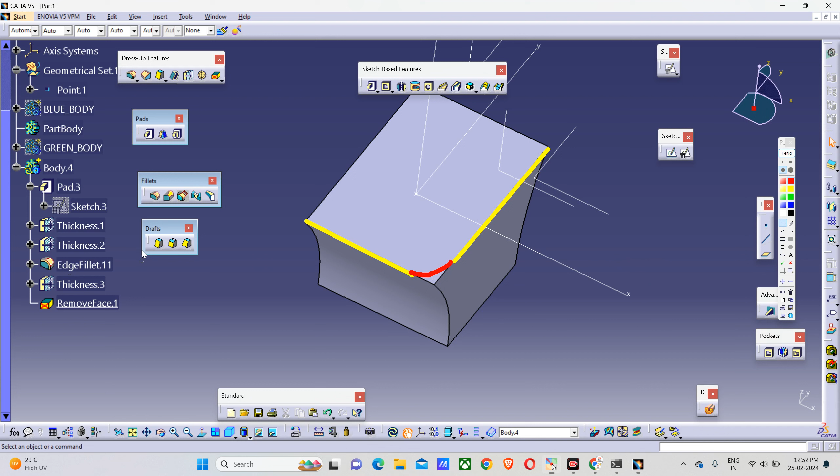So what is tangency? It is a flow of fillet. In fillet, it is a continuity. So here, once if I add the fillet on this edge, we will get a smooth transition, meaning there will be tangency over here.

Yes, with the yellow line. So the flow of fillet will be like this. Are you getting my point? Yes sir, so this is tangency.

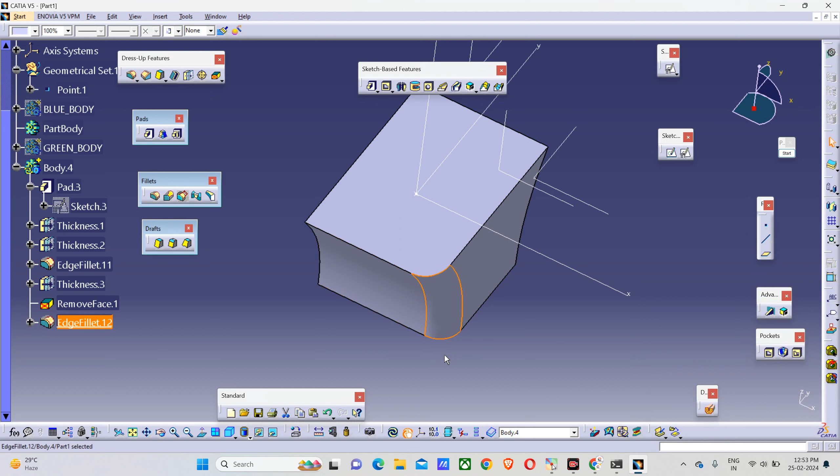Minimal means what? It will not, let's see. I will give fillet over here, something of 15mm. And use fillet. See, sometimes it will fail, sometimes it will pass.

Okay, instead of tangency, I'm giving fillet of 5mm. Select this one, preview. Now you can see here it is getting the tangency. Here also we have tangency. So fillet flow will be something like this, smoothly.

Okay, yes. Double click on this, make it minimal.

Okay, so it will not consider any tangency over here. Can you see? On this edge, the red line has been stopped, and this is the calculation done by the fillet.

So this is the difference between the tangency and the minimal. Minimal is a straight one, only straight. What is that conic parameter? See, no use of this. Conic means we only need a calculated fillet. What is calculated fillet?

Suppose this is your body. You need a perfect circle like this - okay, this is your fillet. But suppose sometime if you need such type of fillet, this you can control by the conic parameter, but there is no use of such type of fillet.

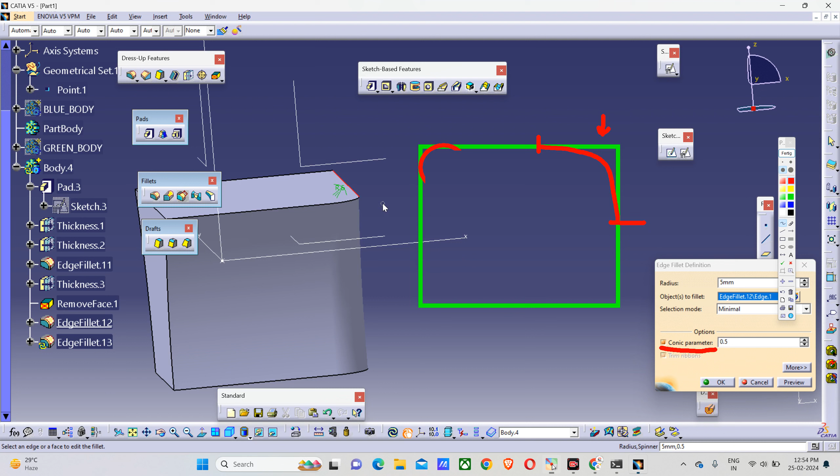Okay, let's check - here there is also a limiting element. No use of this, but I will show you. Double click on this fillet, convert it into tangency, preview. Okay, click on more. What is limiting element? I want this fillet to stop on this plane - this plane means this one.

See, we don't need such type of features, there is no use. See, limiting element - I will give this plane. On which side do you want the fillet - left side or right side of the plane? I want left side, click on the arrow, reverse it, preview. Okay, do you need this one? No, no use.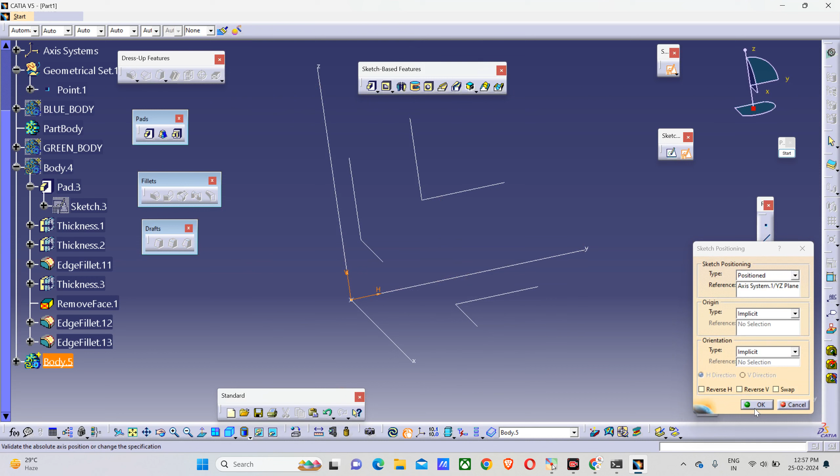Double click. What is keep edges? Okay, see. I will hide this one. I will add a new body, Alt I B. Will draw a sketch on this plane. Will give constraint.

See, it is 30. Is it possible to give a fillet of 50 mm on the vertical side of 30? No, but we can give it. See, what is the height? Measuring tool shows 30. So once I apply the fillet of 50 mm, is it possible?

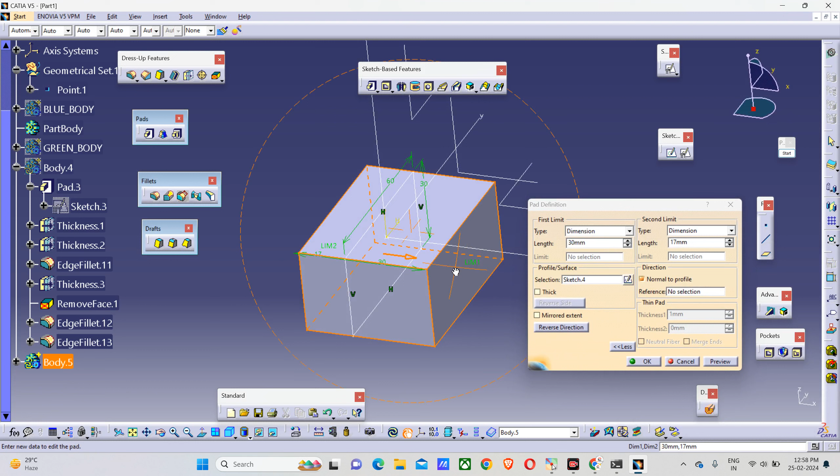What is the upper side? It is 47. So make it a pad, make it 0, I will do mirror extent. Okay, now it is 60, yes, 30. So once I apply the fillet of 50 mm, it will be something like this.

Do we have any material over here? No. So we will use this last option, fillet, more, keep edges. I will select this one, give 50, preview - see the error.

Change the value of the parameter, change the operand of the operation - what is it asking? Change the parameter means instead of 50, give another value. Press OK, give it 30. Will it apply a 30 mm fillet? Yes sir, it will work.

So if you want to give the 40 mm or 50 mm fillet, keep on more. Click on more - keep edges means don't disturb this edge. Now give preview. Can you see? Okay, so this is the use of edge to keep.

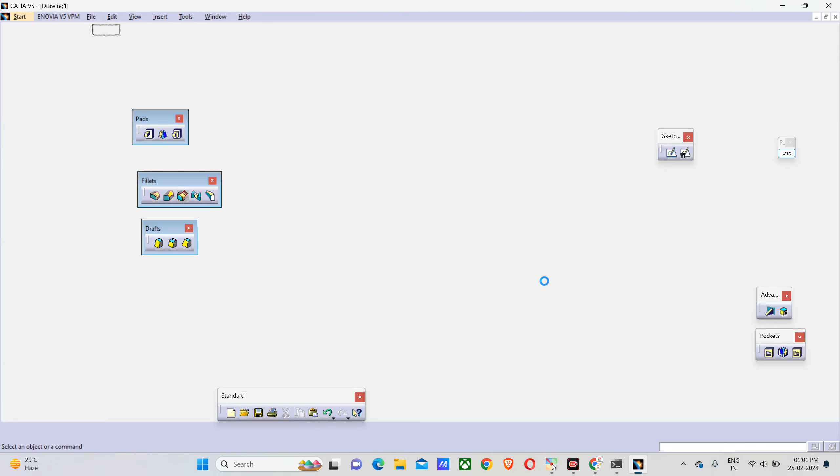I will select the blank sheet. This is my blank sheet. Select the front view. Go to window, part 1. Select any plane - okay, I will hide this body. I will use the green body. Okay no, blue body, I will hide this one.

Select the plane. Rotate the orientation. You can rotate it by using this tool. Click anywhere on the screen, hold and drag it. Awesome, yes, any question?

See how to do practice. I will explain, shall I close the drafting? Close, yes, don't want to save. How to do practice, okay.

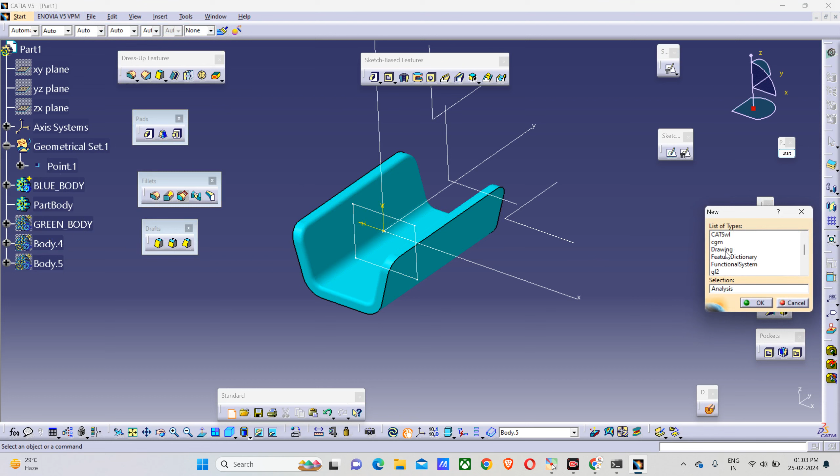Okay, what I will do? You will do it. You will download this file. You have 4 bodies: blue, green, body 4, body 5. You will open a new file. Press P on the keyboard, part 1.

Okay, what you will do? Vertical screen, tile vertical, windows vertical. How you have to work? You have to work on this window. Select all, yes, 3, right click H. What will be the first step?

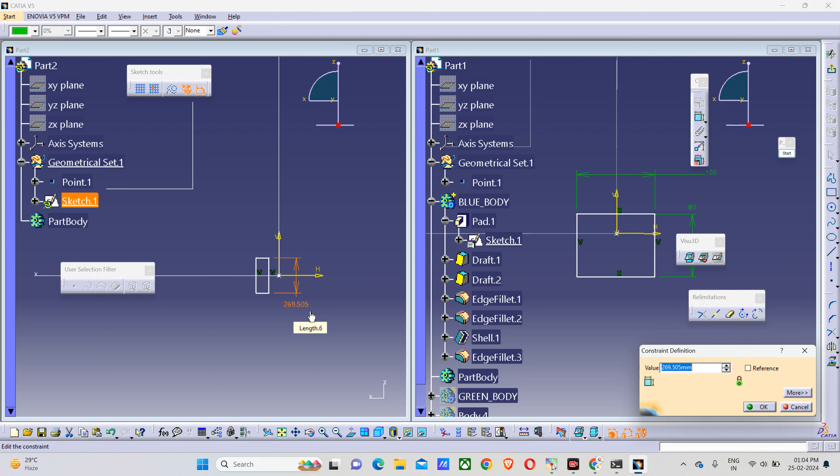See, it is very simple. Rectangle like this. What dimension did sir give? 100. Enter. How much was vertical? Constraint 80. Fit all in.

What origin should we keep? If you want to mirror, you can also mirror. Constraint: first selection, second selection, right click, allow symmetry line, H. Constraint, first selection, second selection, right click, allow symmetry line, V.

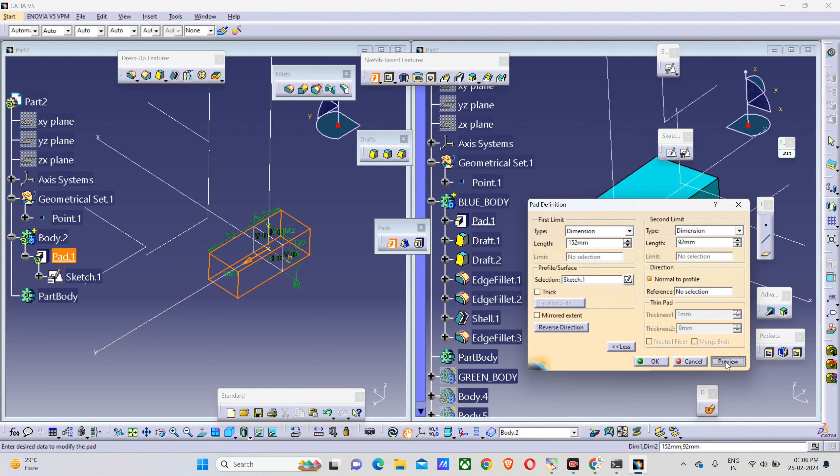Now that sketch will be inside Body.2. Sir had given a pad. Select the sketch, pad - sorry, pad. How much was given? 152 by something. It is not necessary to maintain these dimensions, okay, it's just practice.